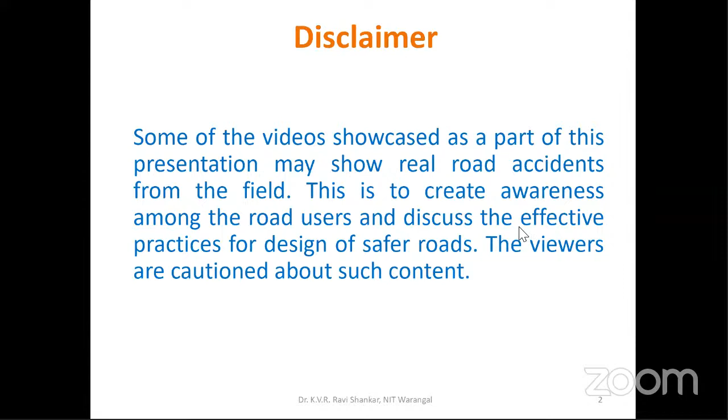That is the main agenda I would like to discuss through this presentation, and I'll be showing some 1 or 2 case studies. These are for educational purposes, nothing else. Wherever required, I have given the source of that information, but in case I have missed it, I'm sorry for that, and I acknowledge all the resources I have taken from.

We'll start with a basic introduction: what is the global and Indian road safety scenario? How it is moving and growing, and how difficult the situation is compared to the kind of pandemic situation we are facing now. We are discussing this pandemic situation, but the road safety scenario is much more critical than this kind of situation.

That is the starting point of our discussion, and then we'll move towards understanding the various stakeholders involved in this road safety exercise and some of the design aspects. Further, we'll have a small discussion on SER, self-explaining roads or forgiving roads, how we can better implement design practices, and the role of different academic and research institutes.

Towards the end, we'll end up with the role of environment and chance, or destiny. Okay, so that is my plan. Let us see how well it will be.

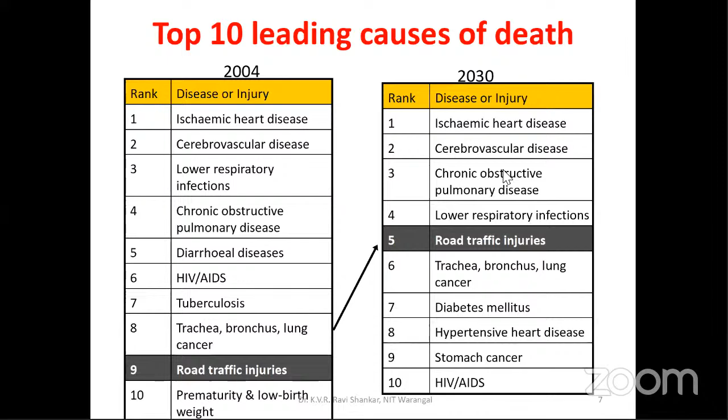If you look at the top 10 leading causes of death, this was the situation in 2004, where it was in ninth position. By 2030, they are expecting it to be in fifth position, but it will be in the top three positions if proper precautions are not taken into account by all the stakeholders.

If you look at the WHO statistics, Africa has the highest road traffic death rates per 1 lakh population. Asian countries are also at 18.5. European countries are in a relatively safer situation compared to other regions, but we still need to learn a lot from all of them.

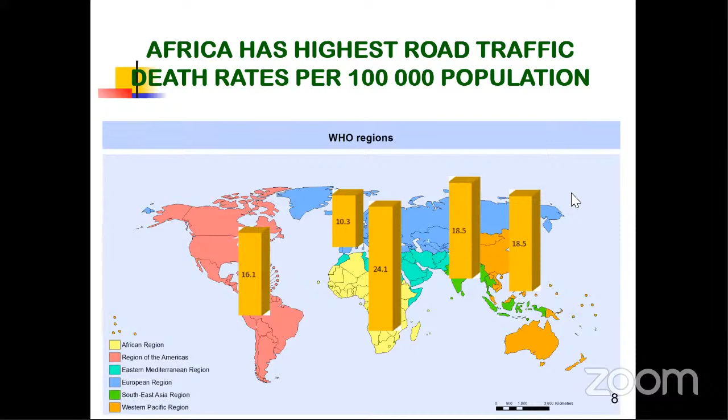The main worrying factor is this category of road users between 15 to 19 years and 20 to 24 years. That occupies the number one position in the younger age group, and in the middle age group it's either first or second. Overall it's eighth, but this is a cause for worry.

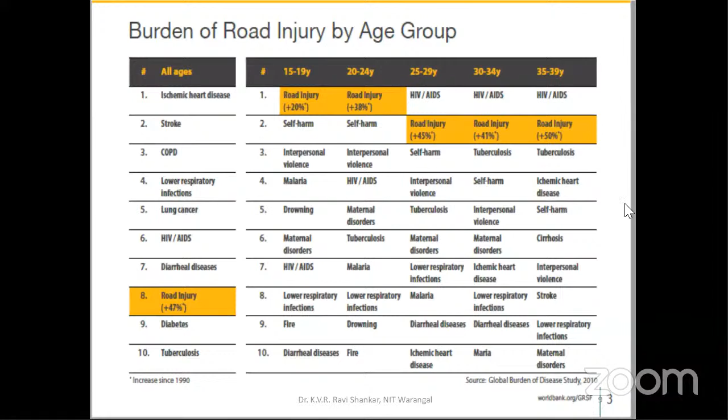Everyone involved in this workshop or related aspects has to take a proactive role in identifying safety issues and educating our friends and family members. That is the reason why I selected this topic, regarding the role of the stakeholders. And that is the global scenario.

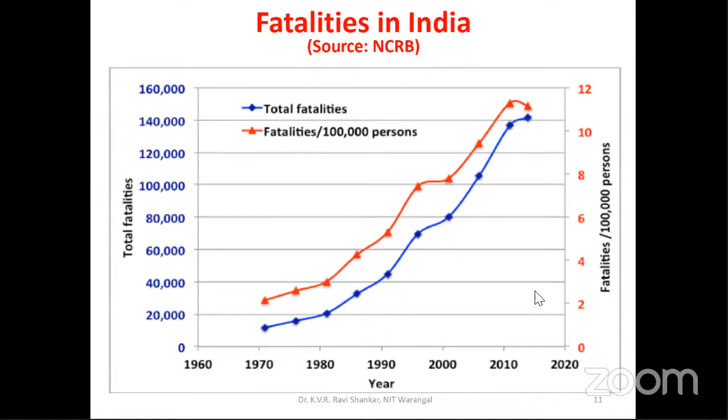Now coming to the Indian scenario, it is not worse than other countries, but we have to look at it from a different perspective. If you look at the total fatality over a period of 4 to 5 decades, it is going up exponentially, as per the latest statistics.

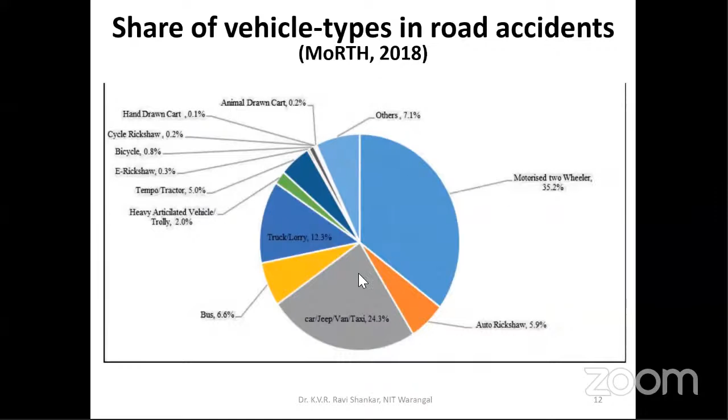Motorized two-wheelers account for 35%, almost one-third of total accidents. Bus, truck, and lorry heavy vehicles have an equally significant percentage, and cars account for 24.3%. This is the current situation in India as per the latest statistics, so we need to look at the safety of motorized two-wheelers and particularly the vulnerable road users.

We have missionroadsafety.com and some other websites available where you can have a detailed look into the statistics. I'm not going into those details since that's not our point of discussion, but just for your information, I gave this kind of slide.

Coming to the first stakeholder, before we discuss who the stakeholders are, one important element is we need to look at some aspects related to drivers, from the driver's point of view—vision difficulties in terms of normal line of sight and limitations in color discrimination, which has to be taken care of in the design aspects.

There are always limitations from the human eye - reaction times and color discrimination, and horizontal and vertical limitations have been taken care of, but still a lot of research is required in identifying human limitations, and whether our design meets the requirements of road users. This will be helpful in designing forgiving roads, so that if a road user makes a mistake, our design should be comprehensive enough to forgive the road user and give a chance for survival. That is the status as of now. Now we'll go further.

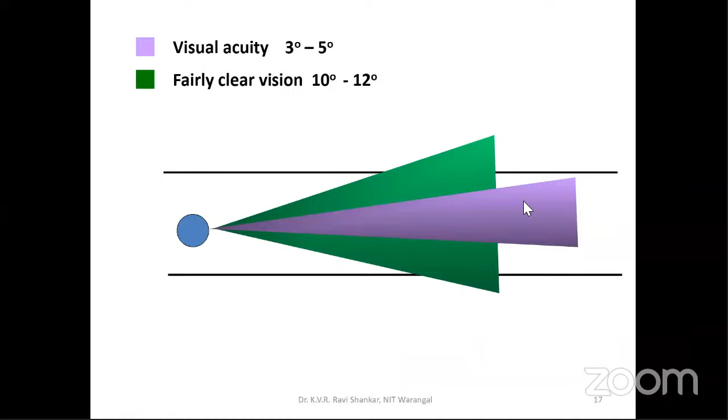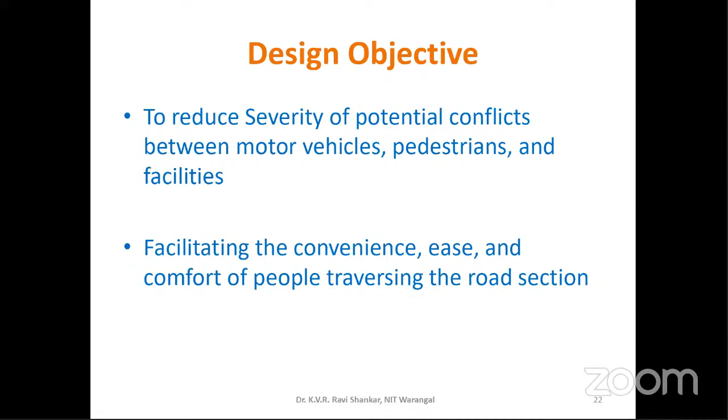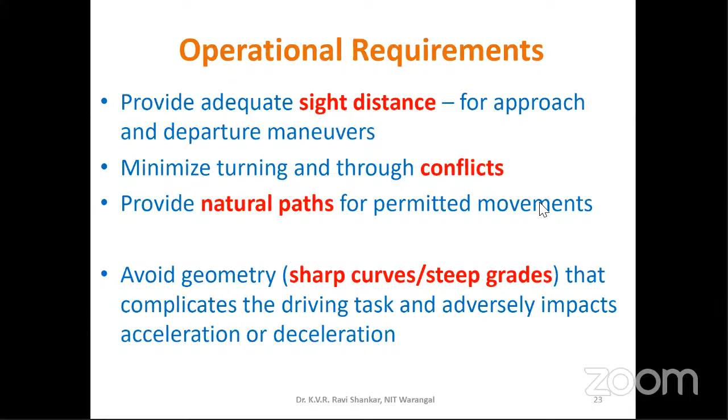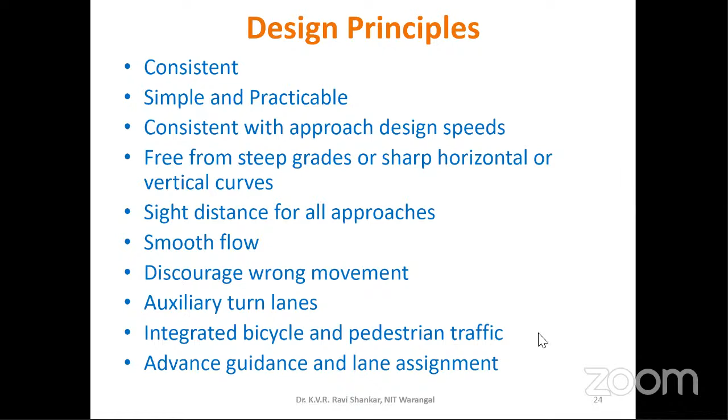These are very important. We have smart cities planned, and in this the integration of pedestrian and bicycle traffic will definitely be a good exercise which we can plan for. Advance guidance and lane assignment is another point to be considered as part of our design principles.

One more point is the gaps in the central reserve. This is becoming a nuisance in some cities, and even on some highway sections, where the median openings - the gaps in the median - are kept wherever it is required or as per the wish of some local people. That is not a good point. At least very close to intersections, we must avoid such gaps in the medians.

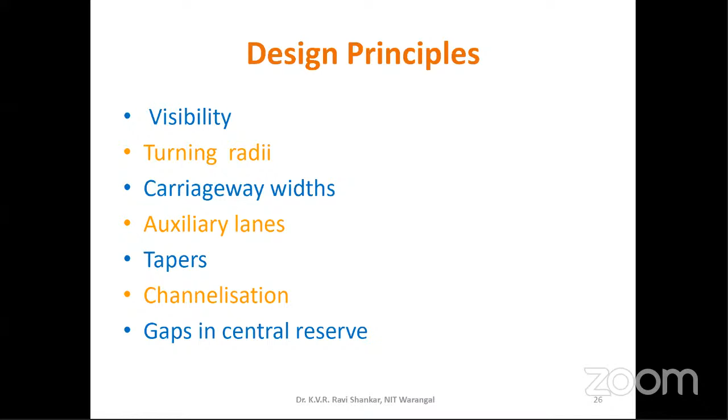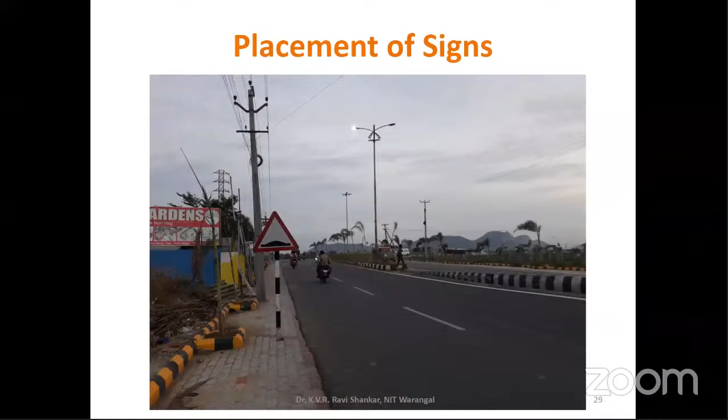And this is what the sight distance involves. When I'm looking at it and moving, obviously there will be some kind of disturbance or distraction - there are some advertisement boards maybe there, and they'll always play some role. But I could not find any strict guidelines regarding this. There are some, but strict guidelines have not been implemented regarding the distance between placement signs and other advertisement signs.

So if you look at the reaction time in an unexpected situation - when I'm not observing the regular travel pattern or regular path of the vehicle, and something unexpected happens, definitely the reaction time is going to increase. All our designs are based on the regular reaction time of 2.5 seconds or whatever it is, but that is not the case in unexpected situations.

When the reaction time is more, definitely more distance is required to stop the vehicle. Here the point is the information content given, especially in an unexpected situation when the driver is multitasking. When driving, the task should only be driving. It can be as simple as changing the AC levels or volume levels - that is also a distraction. You are giving some information to your brain, and that adds bits to it. When something unexpected happens, the reaction time will be more. This is quite a common experience to all of us, but still we make the same mistake.

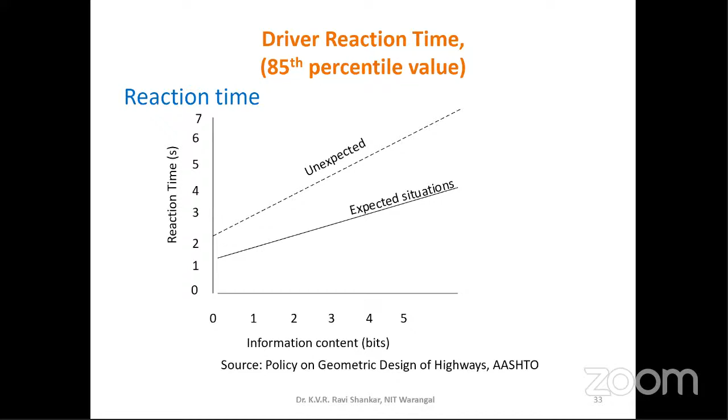Even a KG student is asking - my son is asking me for justification. Why is it like this? What for? What is the reason behind that? So obviously the general public also needs some kind of justification. We have to give that kind of education. Only then will the general public value this. Unless you give that kind of reasoning instead of just general safety education, I don't think it will serve the larger purpose for which road safety education is meant. Of course, this is my view - you can always differ from that.

Otherwise, if you just go for a direct joining, this is very crucial. I stressed this point because on many highway sections there are minor-major road intersections where this kind of situation prevails. Proper channelization with tapers may give room for left and right turns, so that merging and diverging can be well taken care of.

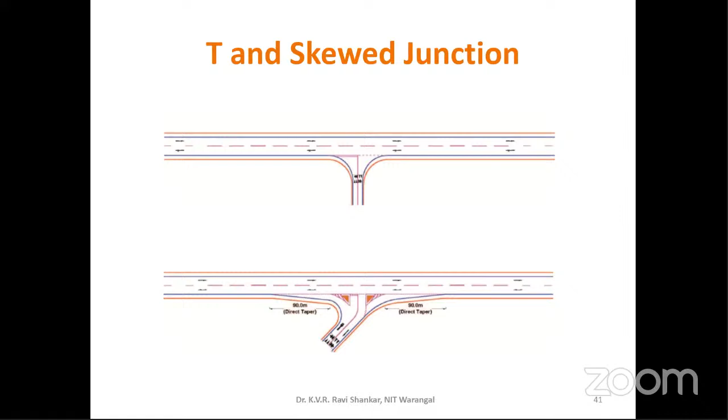At any such intersection, lane changes are happening, so the merging and diverging need to be smooth. If a sudden merge or sudden diverging happens, drivers don't have time to react to that sudden situation, and that leads to some kind of conflict. It's like a chain reaction - even a small change will lead to some kind of problem. The same applies here.

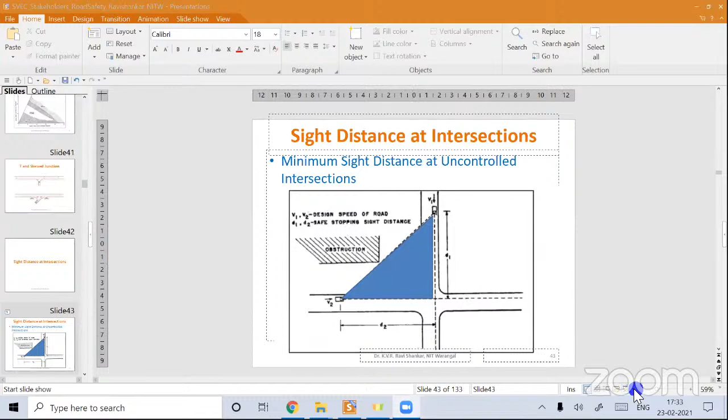Now it may be visible - just have a look at this. Is it visible right now, the video? Yes sir, yes fine. Sorry for that - previously also I played one video, then I sensed something was wrong. Okay, sorry for that, okay.

This is the situation: I'm driving my vehicle, and of course I'm not filming at the same time - I'm not multitasking. My scholar is sitting beside me, and he's filming that. I just approached one intersection where there is only a signal, but a flashing yellow, nothing else.

So I almost raced to this particular place. It has a lot of vegetation, a beautiful intersection. Everything is beautiful except the safety. Almost when I reached the starting point of the approach, the end of the approach of this leg of the intersection, I observed that some vehicles are coming and merging with my line of travel, and I'm planning to take a right turn. If this is the situation during daytime, you can just imagine what happens during nighttime.

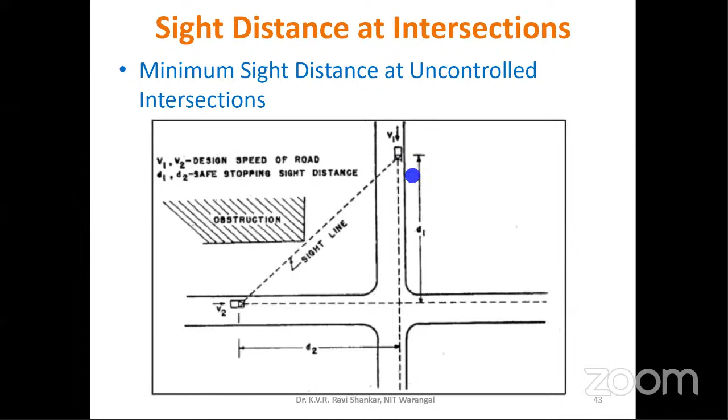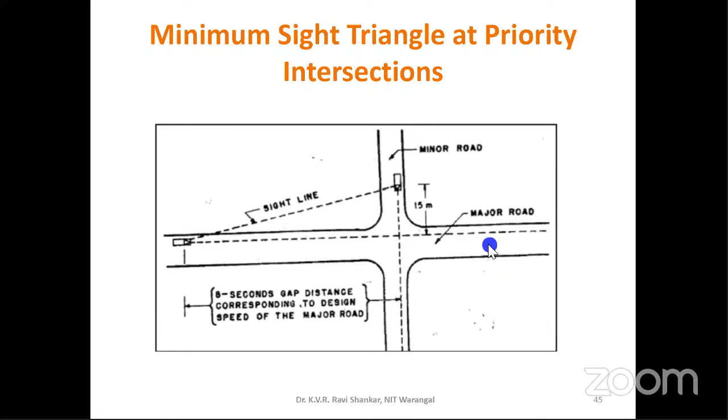I'm not saying this will reduce all fatalities and all accidents, but at least fatalities can be reduced. This kind of sight distance exercise may not need sophisticated instruments - simple ranging rods with some kind of tape and other measurements can easily be taken up for this kind of sight distance study.

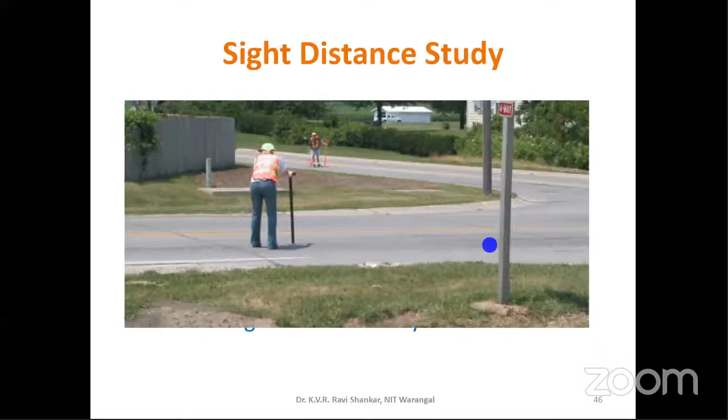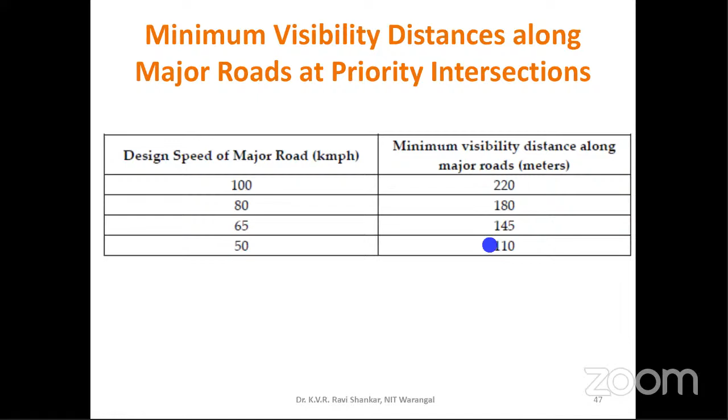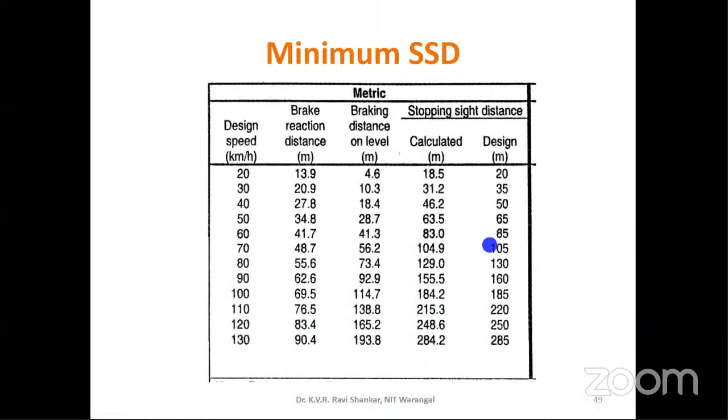These are the codal recommendations regarding the design speed and minimum visibility distance along major roads as per the calculations, and for any kind of intersection the minimum sight distances are also listed - these are available. Keep in mind that the height of the eye is around 1.08 meters, and 2.33 meters for the truck, and the height of the object is 60 centimeters. Of course, the reaction time is also a factor. So in all these sight distance calculations, these are the assumed values - if any deviation is there in these things, that also has to be taken care of.

But that may not be there in the code book, but we have to look at it from the different driver's perspective, different vehicle perspective. And there are human limitations in this exercise also. A driver cannot perceive movement beyond 245 meters. So beyond one-fourth of a kilometer, whether a vehicle is moving or not, you can't sense that. And beyond half a kilometer or so, the details are not clearly visible, and the vehicle appears small at those distances, like a pinhead. So our design should be comprehensive enough to understand this limitation.

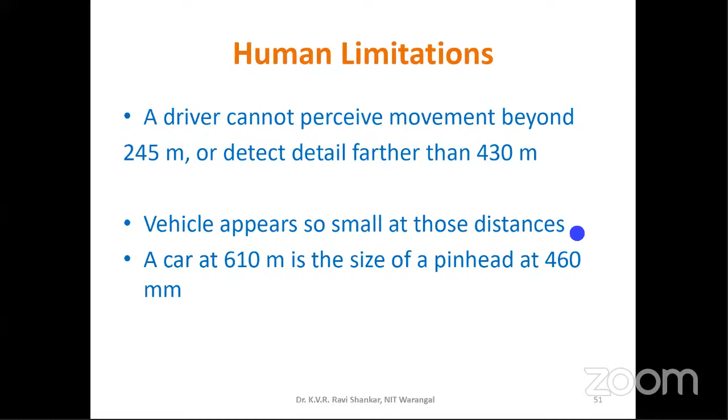And more important is this. Whatever I showed you just now in the video where the right turning is taking place, I took some time to carefully maneuver the vehicle. The total time required for this kind of operation may be around 8 seconds. But some people, expert drivers, will do it in 2-3 seconds. But that kind of expertise may not be lucky enough to survive in the case of an incident.

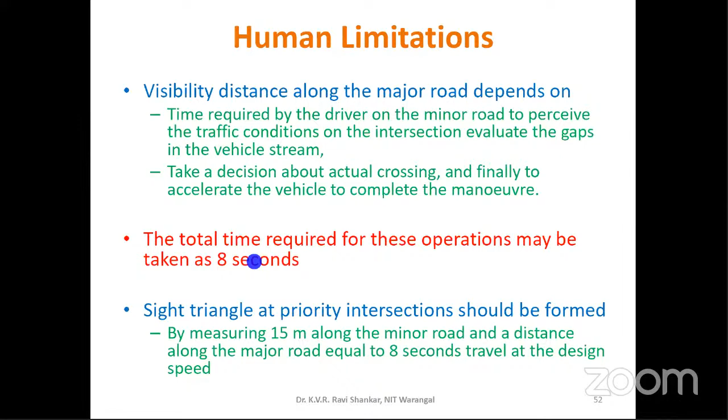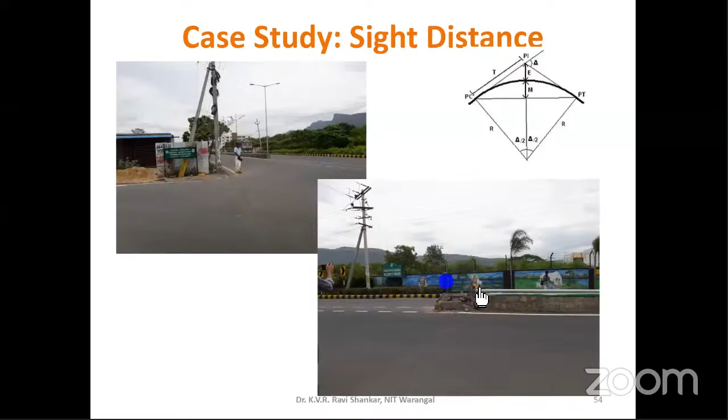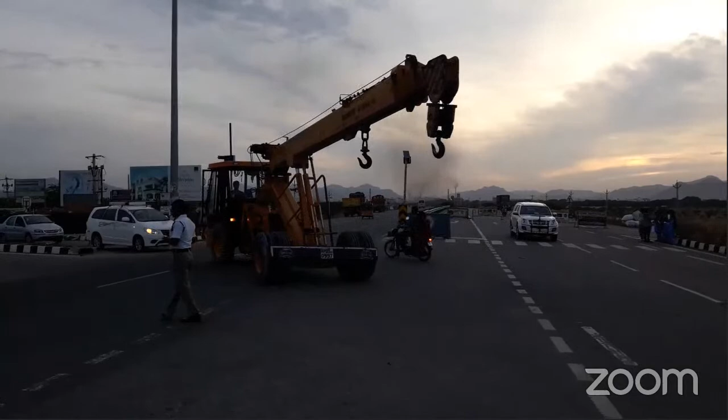So for this kind of intersection, can we provide some kind of redesign, or what kind of alternatives can be there? If you look at this, everything seems perfect. This is another highway section, and a minor road is here. You can see a larger percentage of two-wheelers here. This is a major black spot on this highway section. There are a lot of signs and markings available. Of course, some are not clearly visible, but still a lot of markings are there. But during peak time, many fatal accidents happen, it seems.

But for these kinds of things, sight distance is properly available everywhere. Everything is so perfect as far as our design point of view is concerned. But still, this is posing a problem. They're managing with traffic police at times, but 24-hour enforcement may not be possible. At night, due to the high speed of vehicles, this is causing worry. We need some kind of relook into these aspects, and what kind of extra safety measures we can suggest, I am leaving to the audience.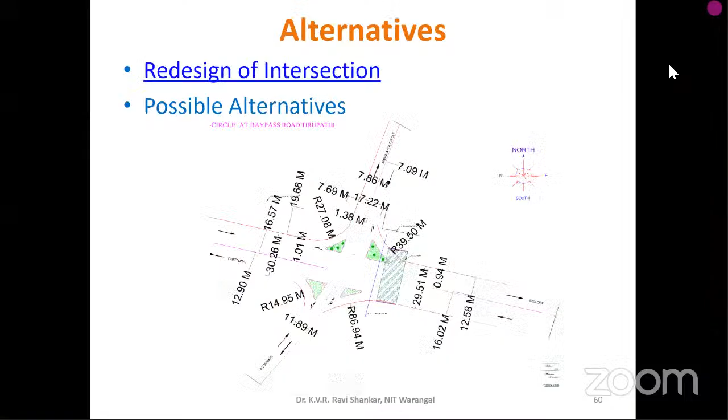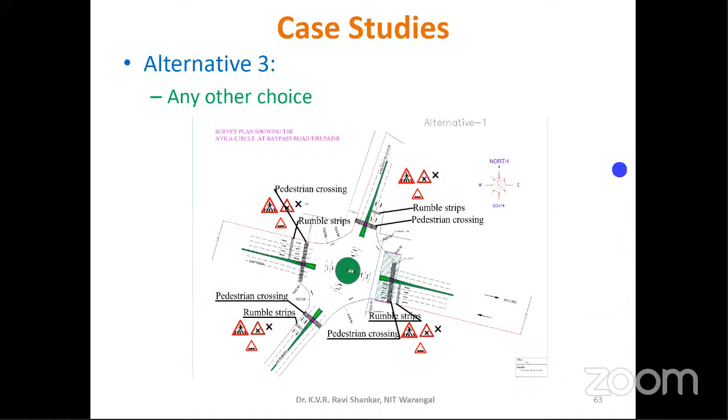So some kind of alternatives, but I don't suggest - I may not recommend this kind of thing, except some kind of rumble strips and some more additional signs and markings. Except that, I'm not recommending this.

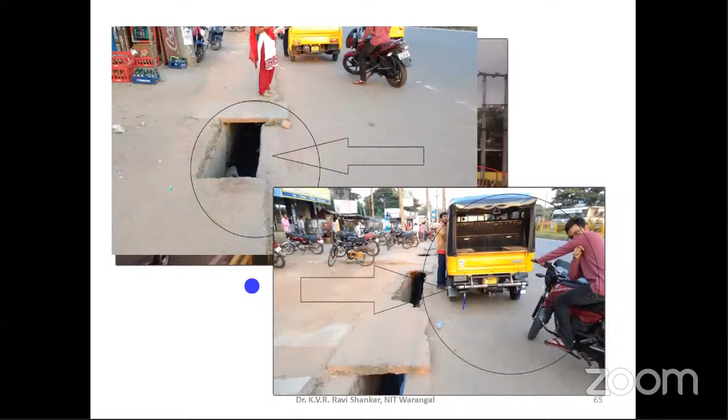Then some more things like this - what is this sign? No right turn - is this the way of doing that? No, there is a proper sign and dimensions available for this. So this is where local authorities have to be very careful in suggesting proper signs and markings, and replacing them from time to time.

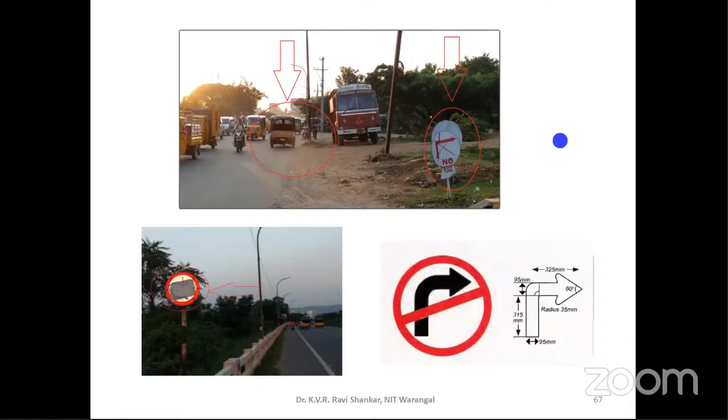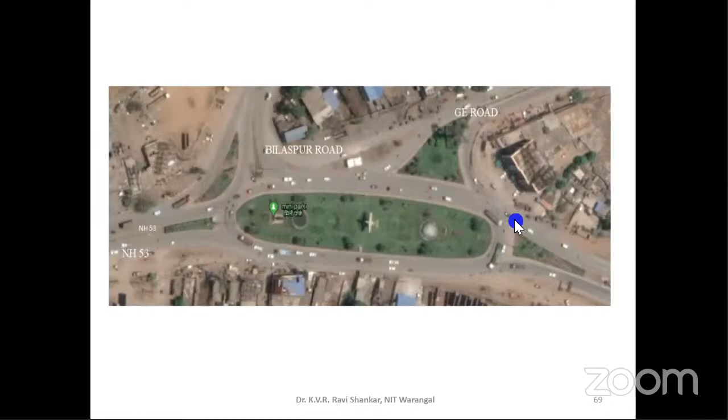And this is one more typical intersection where many legs are intersecting with each other, and these are really a challenge for any kind of design. This is where we need to prove our ability in designing and suggesting some safety improvement measures for this kind of a large sized intersection with the number of legs and all those things.

And this kind of openings near to the intersections - here also the same whatever intersection you have seen just now. So this is the kind of ground situation, and this merging and diverging was not proper. So the merging angle and the diverging angle always play a major role in this kind of intersections.

So this is on the highway side, and something is coming and merging at some angle. So these are properly to be established, and we need to look at the movement of this channelizing island placements, and we have to look at some redesign. Whenever we are suggesting some redesign, we have to look at the vehicular movement, and we should not go blindly with some kind of a redesign.

So we have maybe to place some blocks, concrete blocks, and see that the natural path of the vehicle is guaranteed and the merging is happening at the right place. Then that design can be guaranteed. So always before going for a final design, we have to test it for some time on the road.

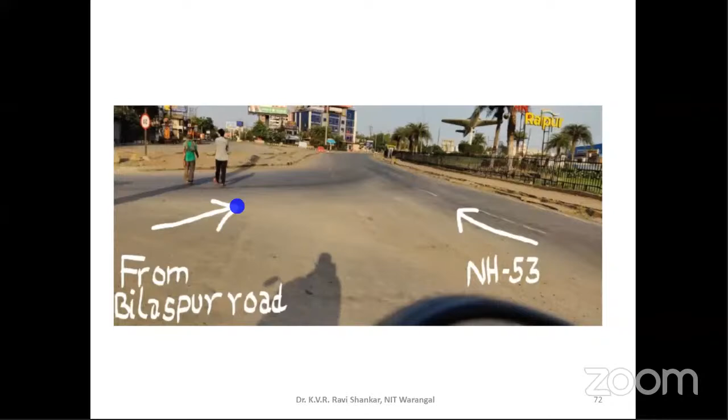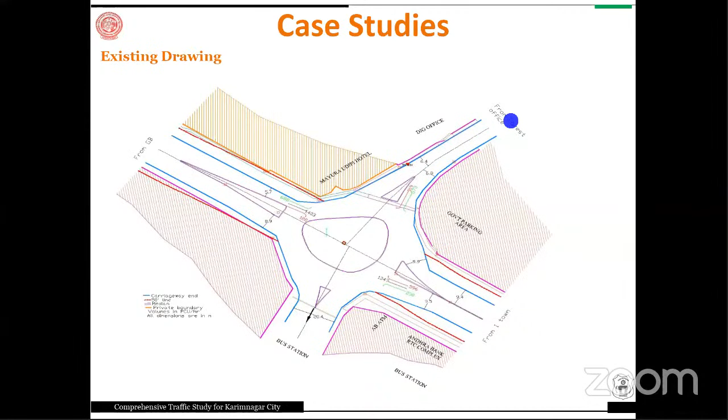So this is also we are involved with some of these things like this. So the previous situation was like this. I don't know what is the shape of that island and all those things, don't ask me. But this is what I suggested.

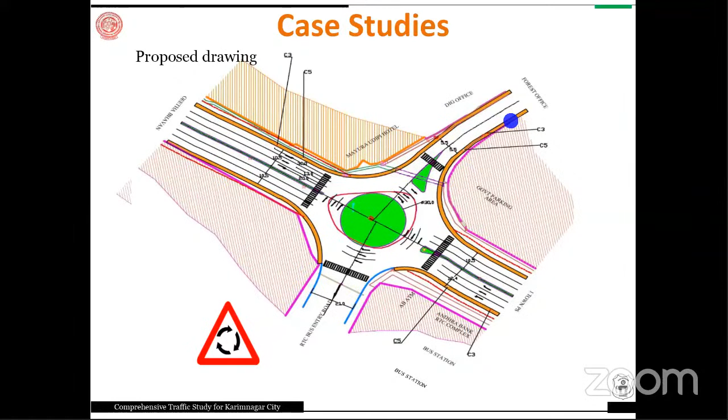This is the present situation after the improvement, and we are looking at identifying whether this improvement is really good enough in reducing the delays and increasing the safety. So that work we are planning still, it is under pipeline.

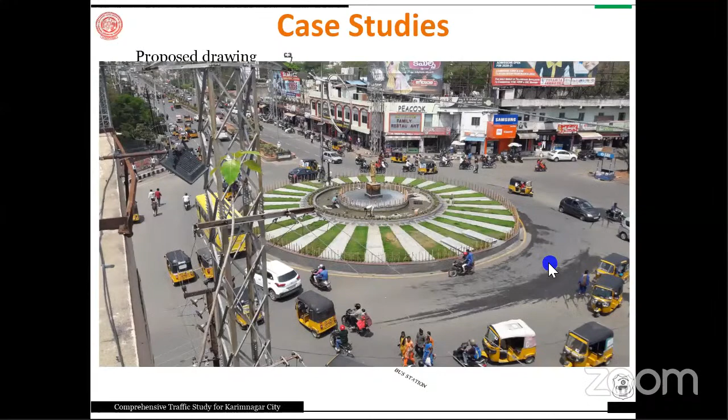This is another intersection, but not much we could do here because of the placement of so many legs, and the shape of the intersection we could not do much. But again, I'm planning for some kind of redesign from the safety point of view. So we may have to look for additional details, and some more additional markings and signs may be required.

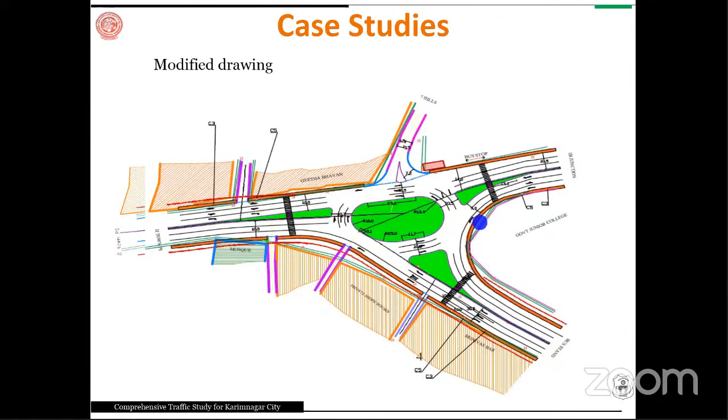Yeah, so that is about some of the design aspects. I have another 10-15 minutes time to wind up. So one more thing is regarding the...

Is there any issue? Can someone confirm? No, sir, please proceed, no issues, right? Okay, no issues, sir, no, right. Okay, thank you.

Okay, then there is traffic calming measures. So there is a long list of traffic calming measures available, like raised crossings, neck downs, narrowing.

But one measure like a rumble strip works wonders in every situation - it won't be the case. We have examples where after introduction of rumble strips, for just a few weeks, the vehicular speeds are reducing, but after some time, after driving on it repeatedly, drivers adapt.

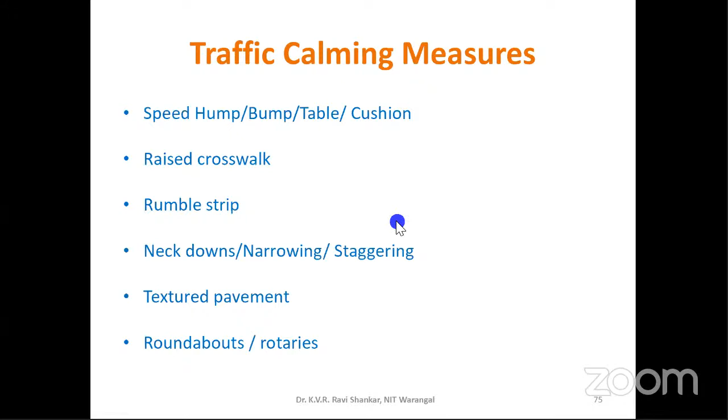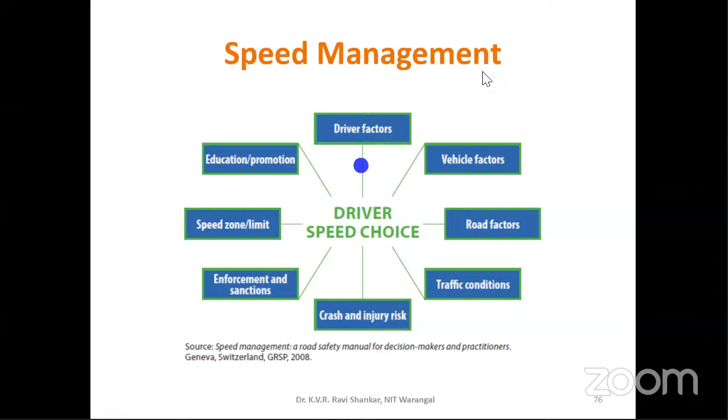So they are only some kind of shorter term measures. We need more durable kinds of safety improvements, and speed management is really the major factor to be considered from the driver's point of view, from the vehicle point of view, from the designer point of view, from the road design point of view, and whatnot. Every stakeholder is involved in the speed management, and what speed the driver will result in affects the subsequent safety of the intersection, safety of the road, the entire road section.

A gradual introduction of signs and speed zoning may be good enough, instead of dropping from a design speed of 100 kilometers per hour directly to 30 kilometers per hour.

You may ask whether placing speed limit signboards can guarantee that those kind of speed reductions will really work out or not. But as a designer, as an engineer, it is our responsibility to do that. If some driver is not following that, we give some kind of penalty, or we have speed enforcement, ANPR cameras are available right now.

So slowly the change has to come from the driver's point. But for planners or design engineers, it is our responsibility to look into these aspects. So this is one important point.

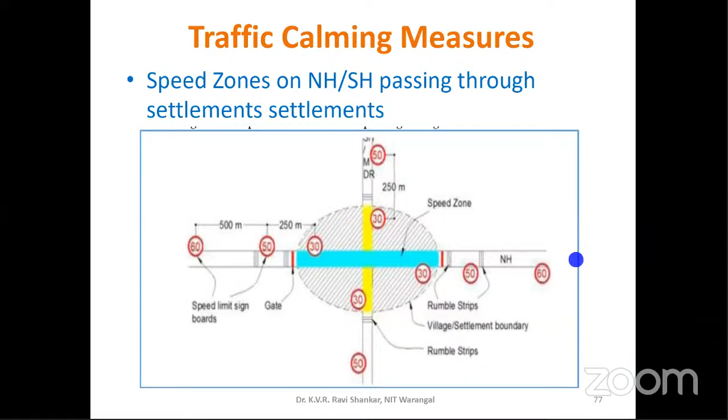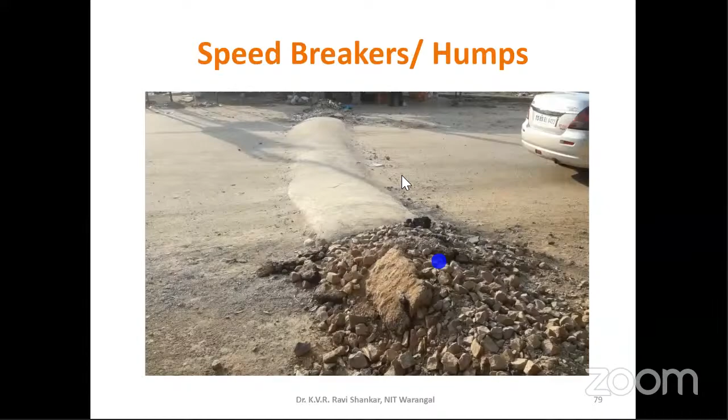Yeah, one more thing is the speed breaker - I don't want to say this. I'm leaving it to your imagination.

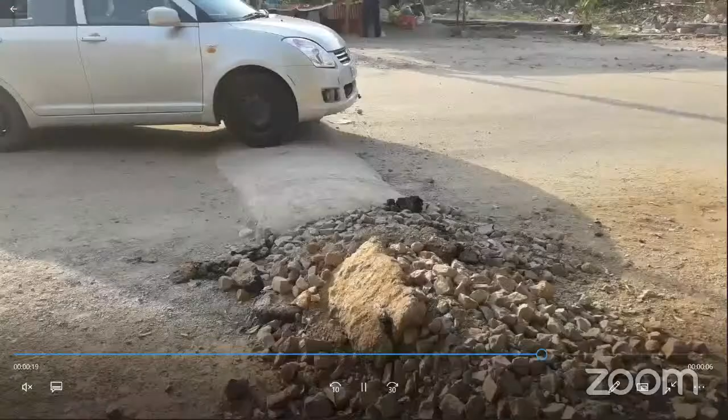Okay, speed reduction is required. This is the speed breaker suggested as per our IRC code of standards, but the implementation is the issue here. There is a cause for safety here. The safety element was introduced, but...

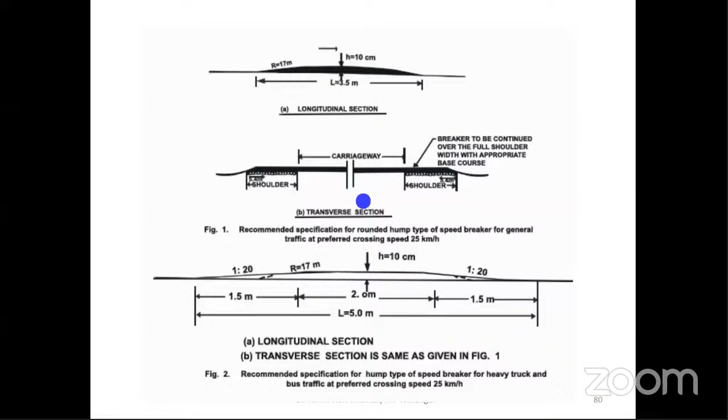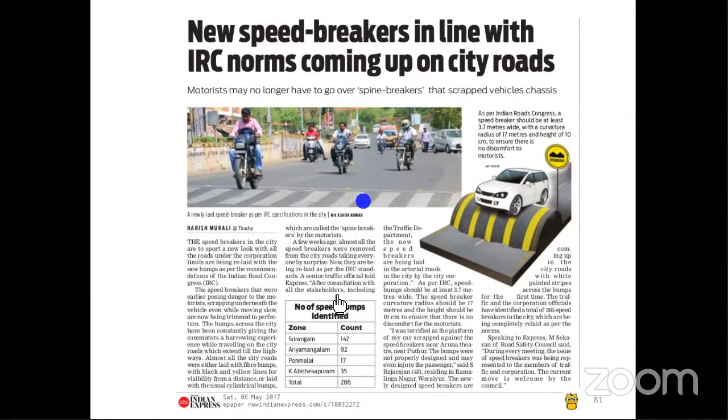So I have seen something like this on a national highway section. You can see some 3D speed breakers from Delhi, but all these things will not always work. I'm not going into those details.

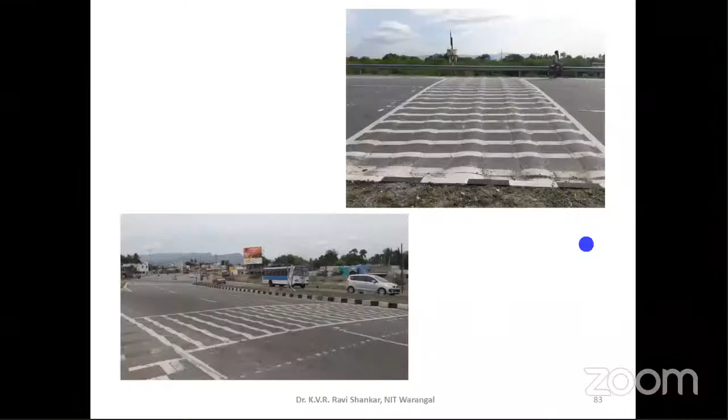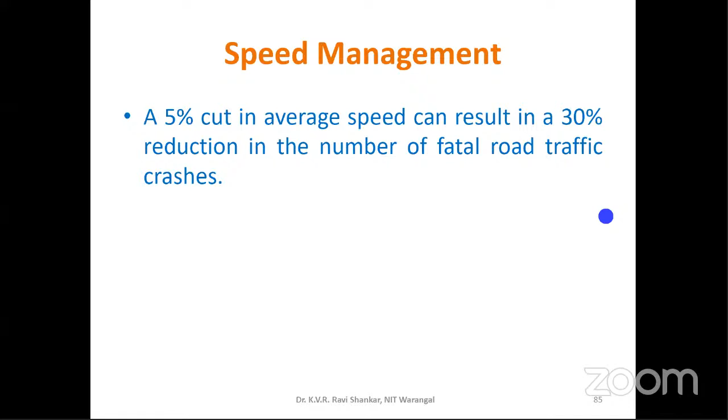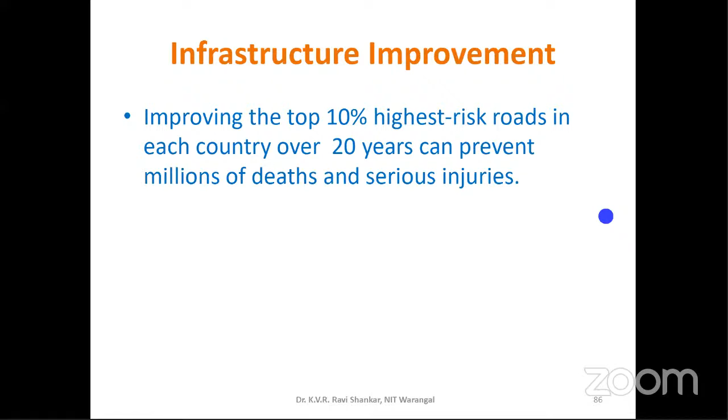That is the point I mentioned initially itself. And just improving the top 10% highest risk roads in each country over a period can prevent millions of deaths. We might definitely, yeah, some...

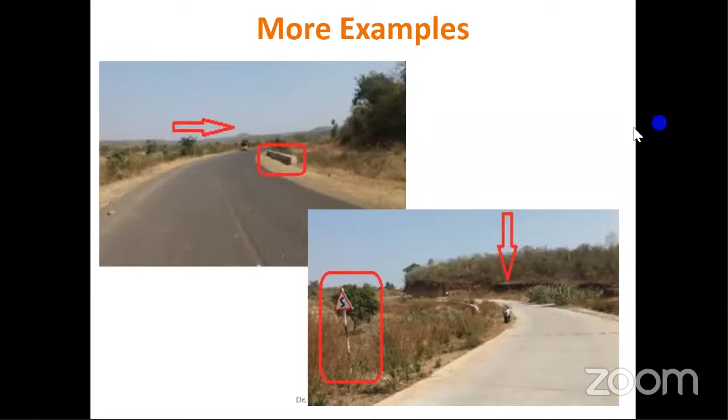Like this, nighttime, nothing can be visible. One more point is regarding the alignment. So is it required for this kind of alignment? Can we go with more permissible curves other than this?

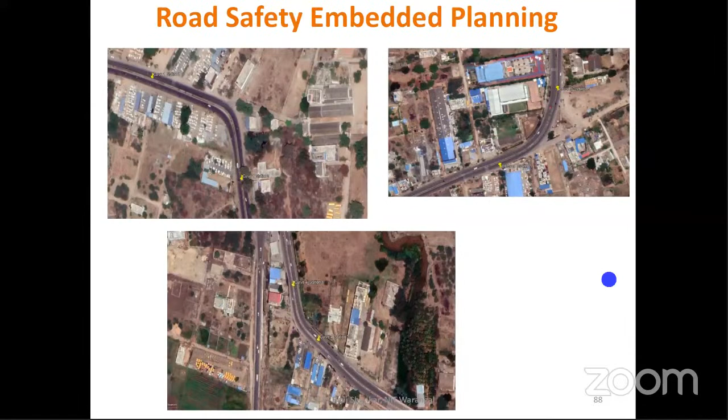Well planned during the planning stage itself. So that is about the design perspective and the stakeholders involvement.

Sir, please proceed, sir.

Have a key role in identifying the proper measures and whether they are really effective or not, and measuring the difference in the final outcomes. So this is the role of academicians and researchers as stakeholders in doing this kind of action, outcome and impact assessment.

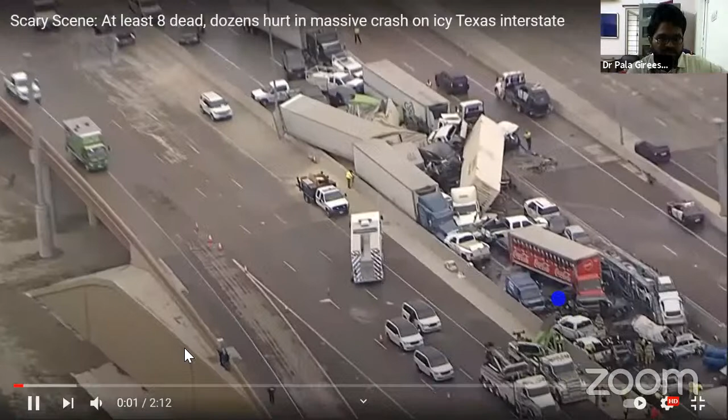Now just the last few slides. You might have heard about this particular accident in the recent past, just a few days back in the US. There was a multiple collision, more than 100 vehicles were involved. Several people were injured and there were fatalities, a number of fatalities. The major reason was snowfall, but in spite of the best design and best safety measures that have been adopted on this kind of highway section, such a major fatal accident, a multiple collision, happened involving more than 100 vehicles.

So here I am speaking about the role of the environment. When we have everything in control, but it is not the case, the environment, the nature itself, you can understand the situation from this.

So that is the case. The environment is also very important as a stakeholder, and in spite of our best designs, when the environment is not good enough, we are going to fail, as a driver or whatever it is.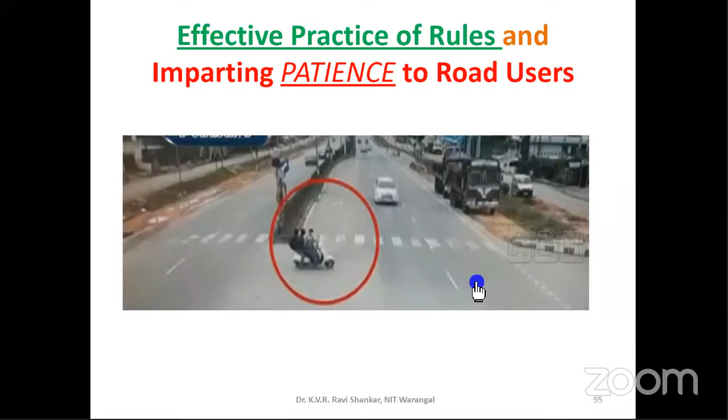So it is not only about effective measures or whatever it is. This is the lack of patience. We have to create awareness that every road user must have a little few seconds waiting time, nothing more than that. That is my final point.

So this is what I already told you regarding self-explaining and forgiving roads, road safety embedded planning and design, and regular safety audit exercises every year should be conducted, and more importantly the involvement of the general public. When all stakeholders are involved and they create awareness at schools and colleges regarding this, then definitely our future will be much more beautiful.

So with that, I'd like to close, and thank you for the kind attention. Any quick questions can be taken up. Sorry, I might have taken 5 minutes more time.

Sir, very nice session, I really enjoyed it a lot. Yeah, but please educate your friends, family members, and colleagues regarding safety. Sir, I am Sadish Kumar from Madurai. I am working as an assistant professor at PTR College of Engineering, Tamil Nadu. I am pursuing my PhD as a research scholar at Alagappa Chettiar College at Karaikudi.